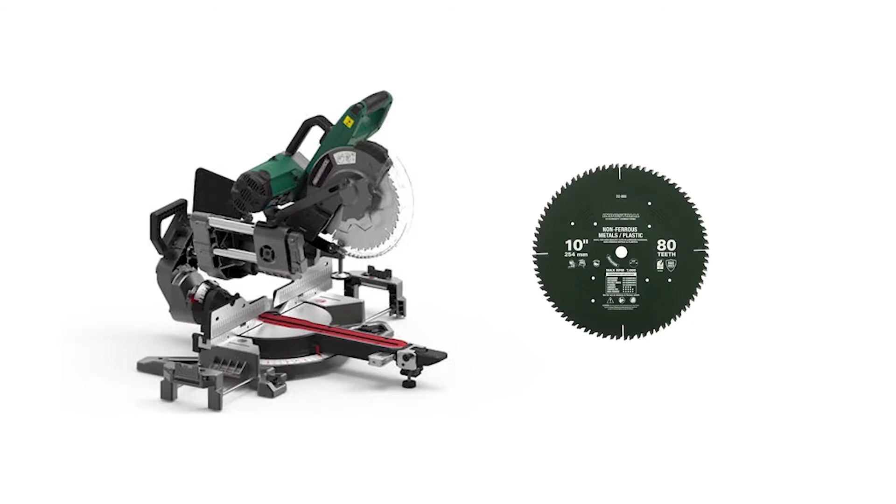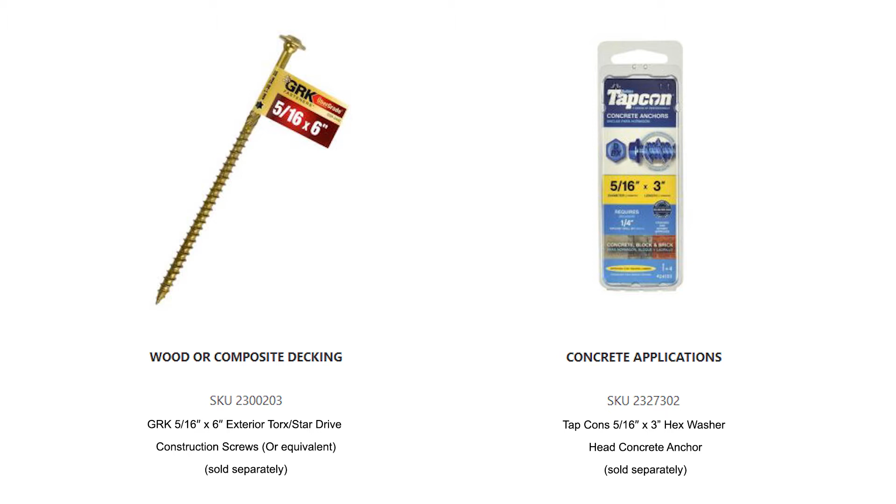We recommend the following tools: safety glasses, tape measure, pencil, level, miter saw with non-ferrous blade, cordless drill, 4 clamps, carpenter square, appropriate fasteners for mounting posts to deck surface, lower rail clip jig, cutoff tool, 6-inch number 2 square

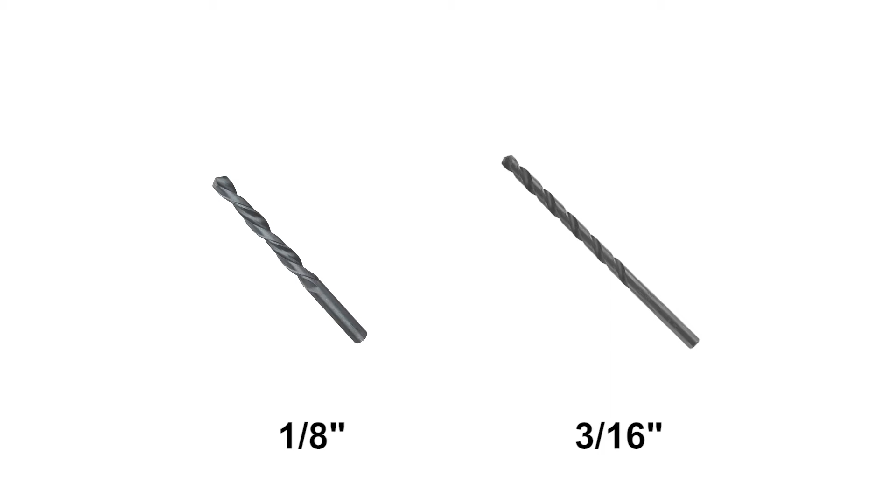drive bit, 1/8" and 3/16" drill bits, 3/16" hex wrench included with cable kits, cable gripping tool (optional), cable cutting tool (optional), cable release tool (optional), threading tool (optional), 90-degree threading tool (optional). Kits and parts for assembly:

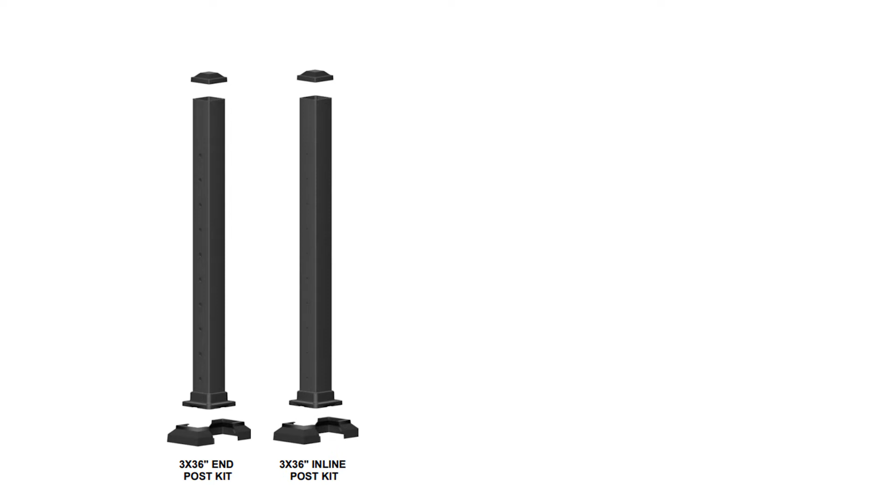3x36" end post, 3x36" inline post, 3x36" corner post, 3x42" inline stair post, 3x42" end stair post. Each post kit includes an aluminum post tube with attached base plate, post cap, 2-piece base plate cover and an install guide.

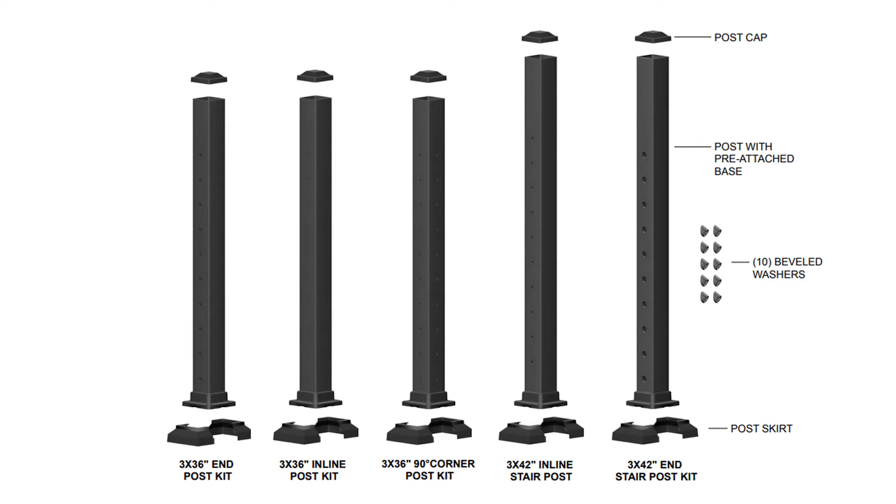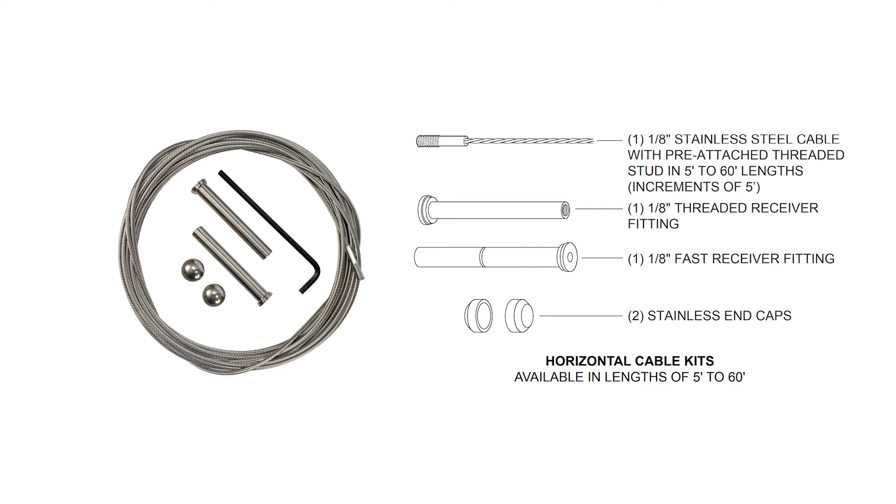3x42" end stair post kit includes 10 beveled washers. Post to deck mount screws and anchors are sold separately. Horizontal cable kits are available in lengths of 5 feet to 60 feet. 1 1/8" stainless steel cable with pre-attached threaded stud in 5 feet to 60 feet lengths, increments of 5 feet.

1 1/8" threaded receiver fitting. 1 1/8" fast receiver fitting. 2 stainless end caps. Horizontal cable deck stair full frame kit: 1 top rail snap, 1 top U-channel, 2 straight plastic plugs, 2 angled plastic plugs.

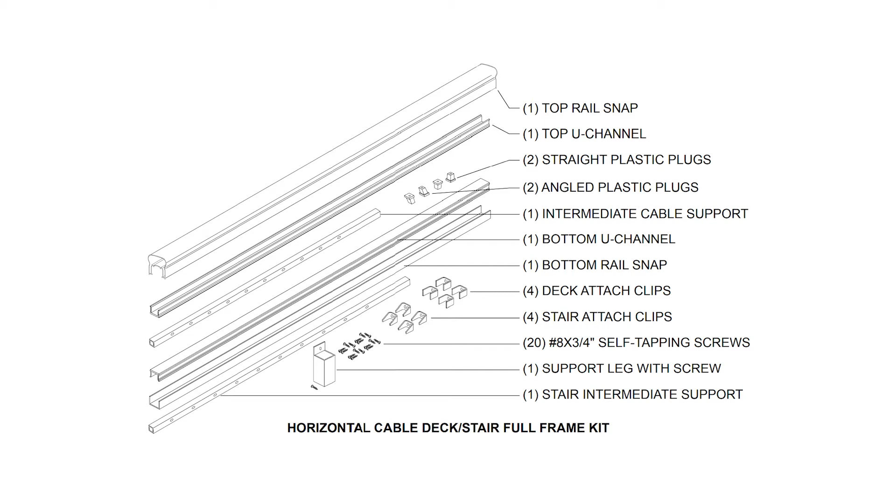1 intermediate cable support, 1 bottom U-channel, 1 bottom rail snap, 4 deck attach clips, 4 stair attach clips, 20 number 8x3/4" self-tapping screws, 1 support leg with screw, 1 stair intermediate support. Important notes: do not install base plate covers until railing assembly is completed.

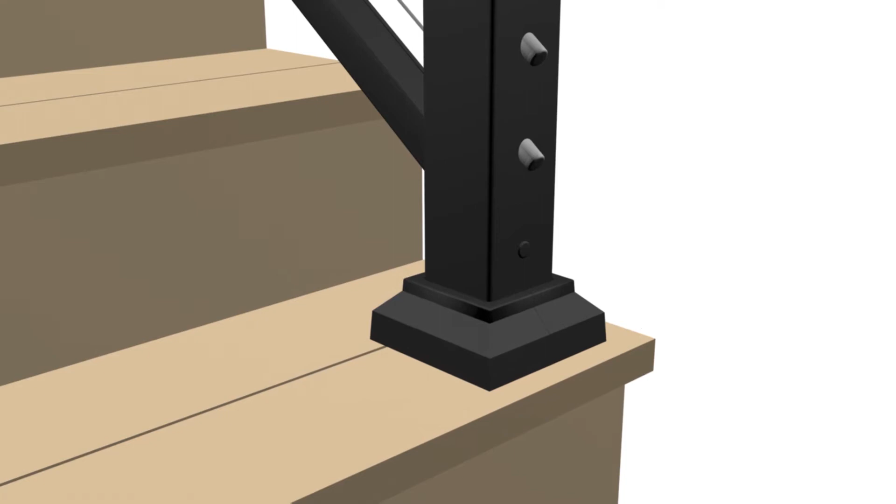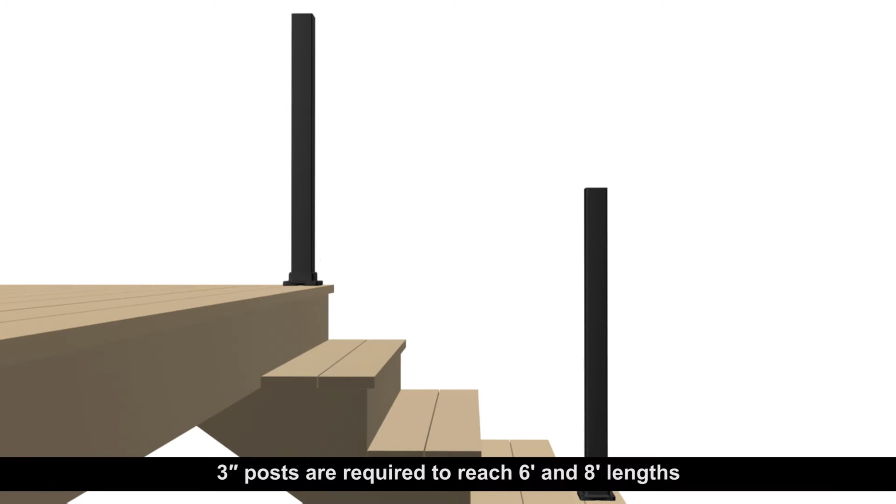Actual cable panel lengths are 69.43 inches and 91.31 inches. 3-inch posts are required to reach 6-foot and 8-foot lengths. Caution: if installing lighting, wiring must be installed prior to securing posts to deck surface and installing top rail snaps. Note: for structural integrity and proper installation, it is critical to use the correct railing posts in all locations.

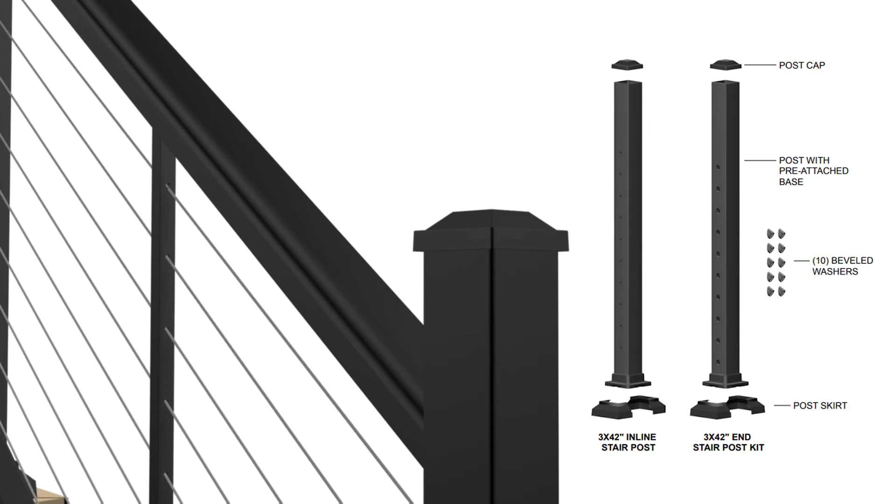Corner posts are required for all 90-degree corners, and inline posts are required for all 45-degree corners. 42-inch stair posts are required for stair applications. Plan ahead for cables up to 60 feet in length and install end posts at the appropriate locations.

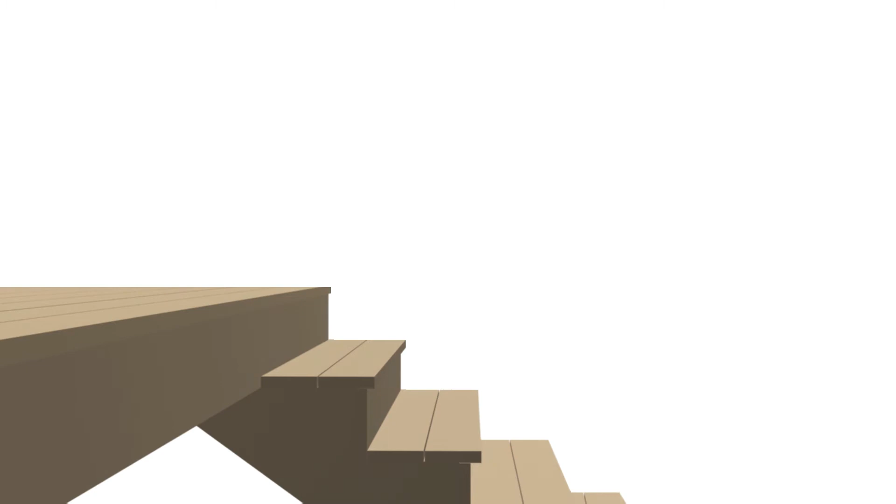Important: for 90-degree corner post applications, prior to installing rail attachment clips, ensure plastic plugs are installed in 2 pre-drilled hole locations. Leave plastic plugs in place until threading cable through corner posts. Determine necessary stair posts required. Install proper post blocking. Use proper attachment screws or anchors as directed. Deck screws at each post location are not included with post kits.

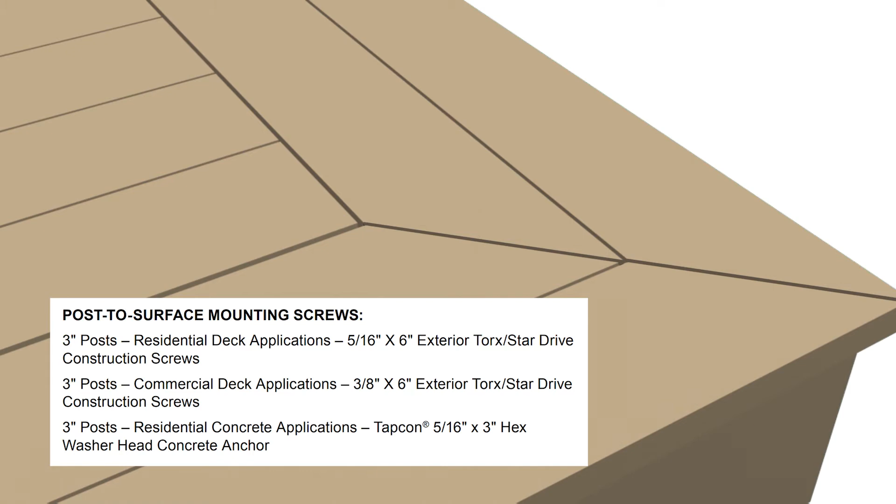With 3/16" drill bit, pre-drill through deck boards and into blocking. Drill a 5/8" hole in center of 4 deck screw holes for lighting wires, optional. Level and plumb post using shims. Secure posts to deck with suggested screws.

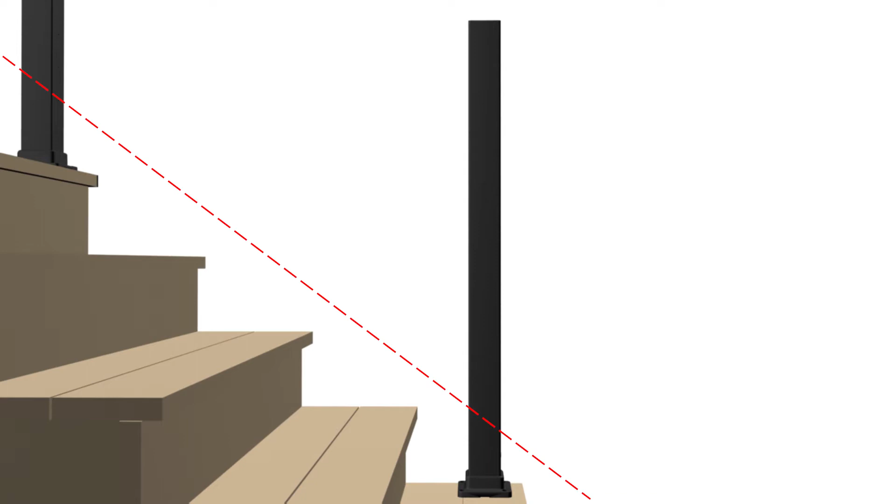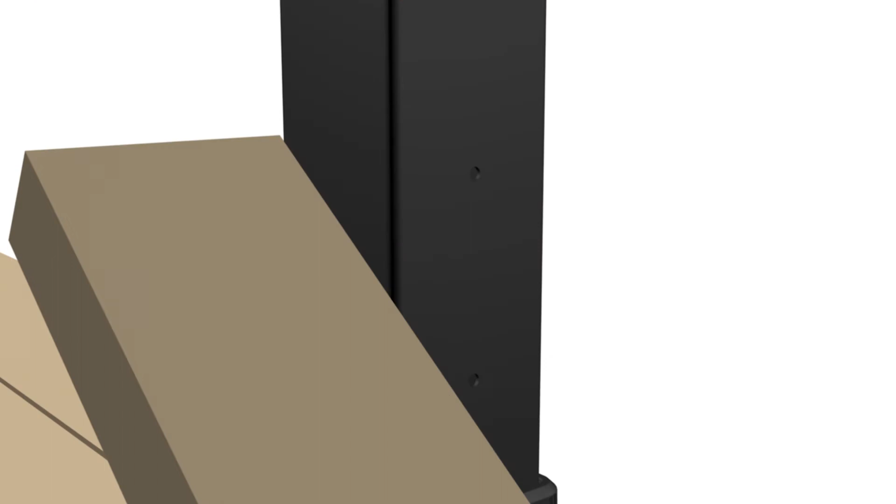Important: front edge of base plate should be equal distance from nose of stairs, however no further than 1 1/2" setback. Note: ensure cable holes align with up-down direction of stairs. At each stair opening, position one U-channel 1 1/2 inch above stair nosing. Tip: place a 2x4 board flat on nose of stair treads and lay U-channel on top of 2x4 board.

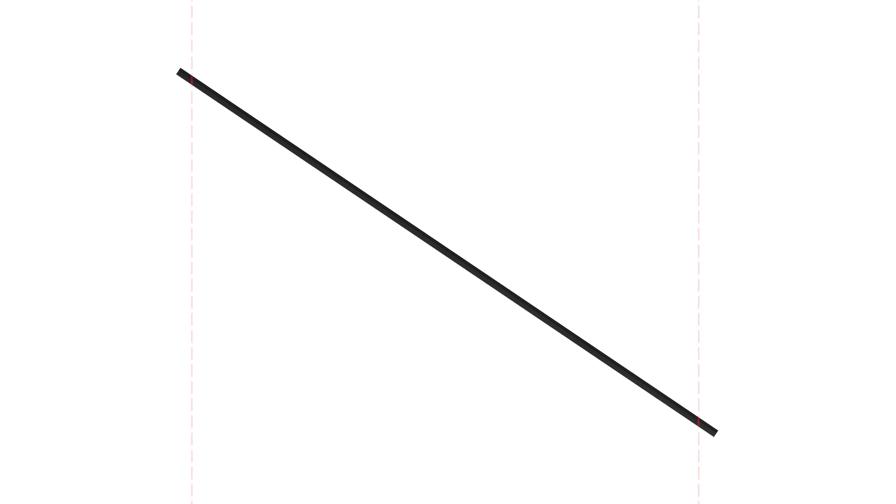Clamp U-channel against 3-inch stair posts. Using a sharp number 2 pencil, mark the U-channel. Remove clamps and cut U-channel with miter saw and a non-ferrous saw blade. Clean cut areas and apply touch-up paint on exposed ends. Measure and mark the center of each U-channel. Drill 1/8 inch hole in the center of each U-channel.

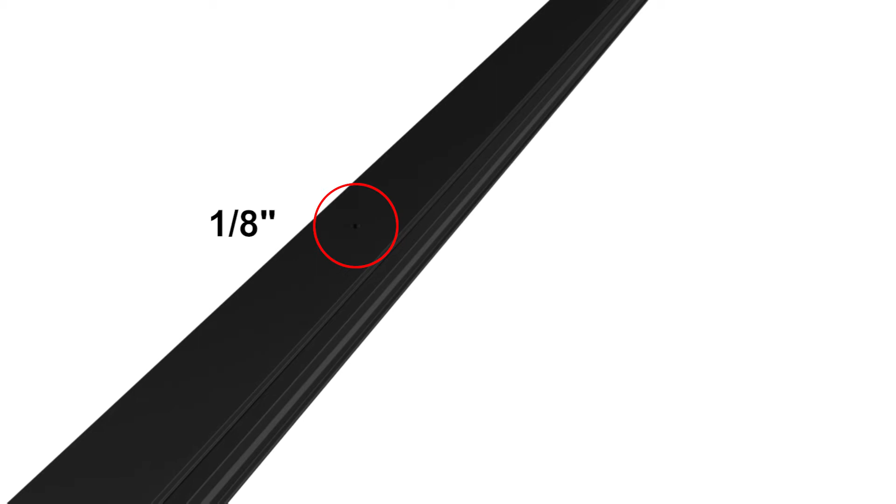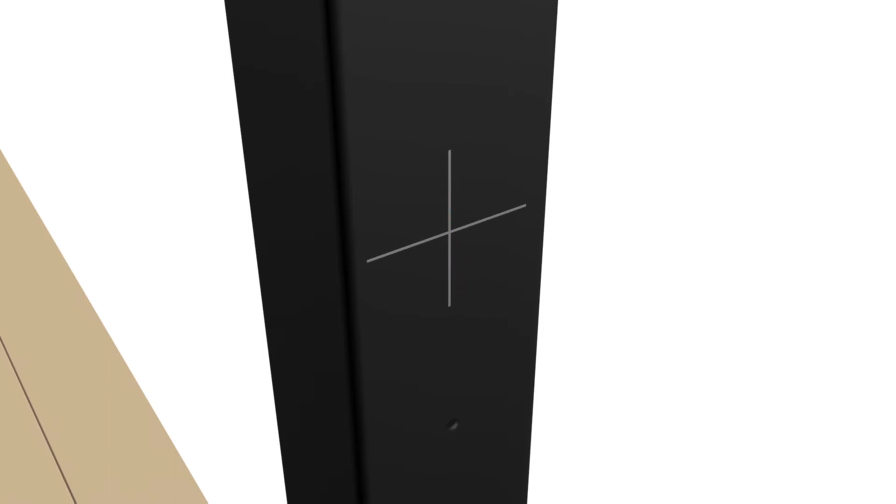For 36-inch stair railings, measure down from the top edge of top post and place a horizontal pencil mark at 3 5/8 inches. Next, measure the center of the 3-inch posts and place a vertical mark at center of post. Place a 2x4 board on nose of stairs between posts. Place a pre-cut U-channel on top of 2x4 and scribe a pencil line on 3-inch post at upper and lower post locations where U-channel meets post.

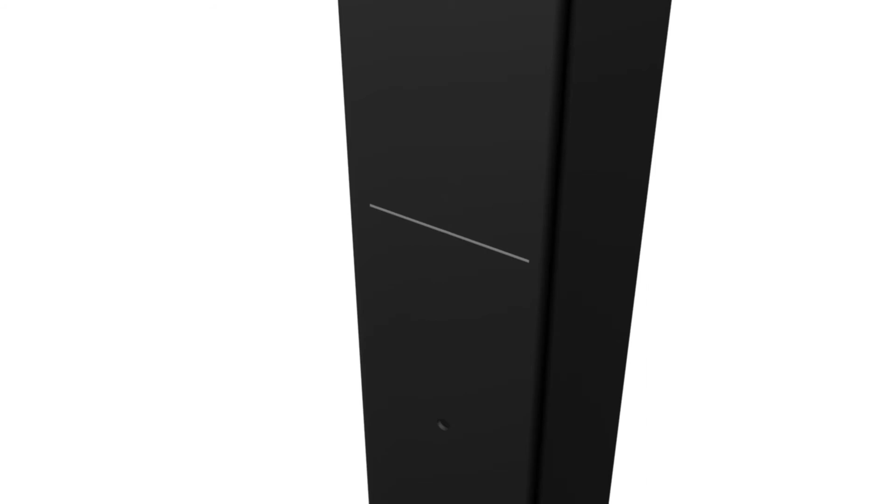Center and align top edge of lower stair rail clips with pencil marks. Attach using two number 8 by 3/4 inch self-tapping screws. At top post location, measure distance between top edge of lower clip to upper line. Note measurement. Return to bottom post and measure up from top edge of lower clip and place pencil mark on post at equal distance as noted on top post.

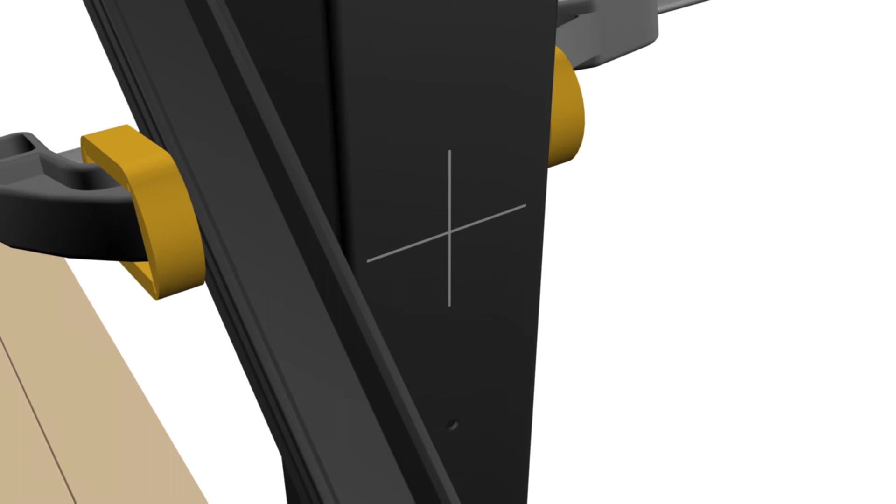Clamp upper U-channel against posts at marked locations. Once channel is clamped to side of post, measure both top and bottom distance between lower U-channel and upper U-channel. Make necessary adjustments to achieve equal opening distance. Using a sharp number 2 pencil, scribe the side of U-channel cut lines.

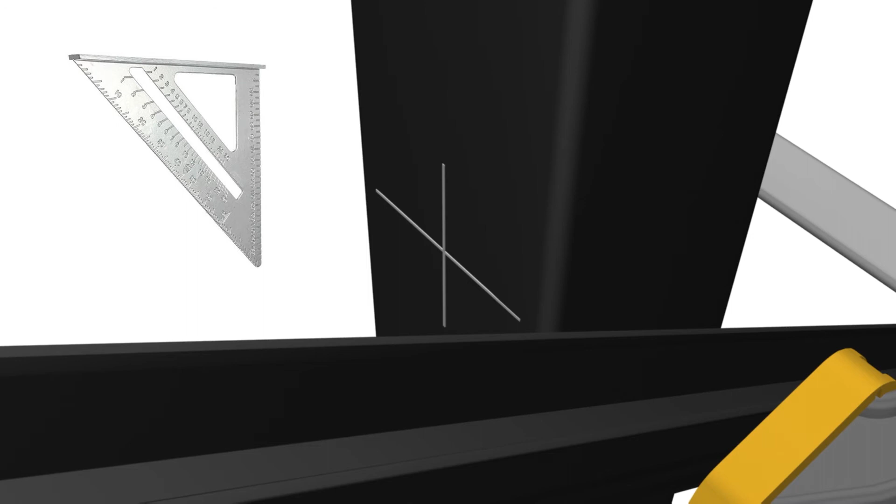Important! Before removing clamps, if adjustments were made from original marked line, a new line will need to be drawn. Use a carpenter square to properly mark new attachment clip position. Install upper clips, both upper and lower posts, with top edge of clip on marked line.

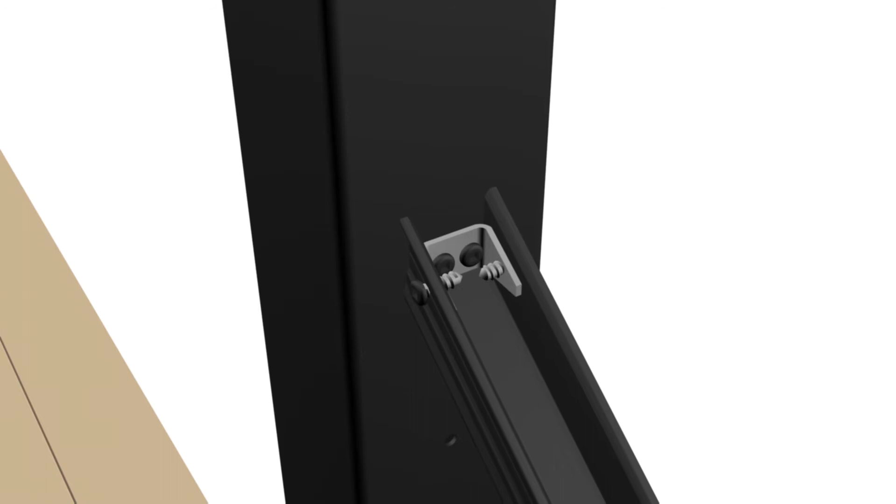Attach one plastic 3/4 inch by 3/4 inch angled plug to lower U-channel with one number 8 by 3/4 inch self-tapping screw. Secure upper and lower U-channels to attach clips with number 8 by 3/4 inch self-tapping screws.

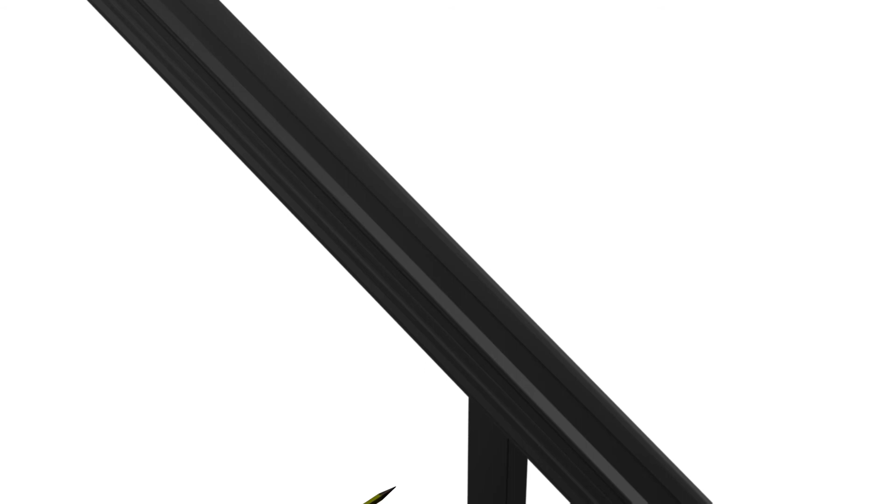Clamp intermediate cable support vertically to the center of upper and lower U-channel. Ensure cable holes align with upper and lower post hole locations. Using a sharp number 2 pencil, scribe cut lines on intermediate cable support and cut intermediate cable support at scribed pencil lines, taking care to cut at appropriate angle. Important! Cut 1/8 inch less saw blade thickness than scribed line to allow for fitment of plastic plugs. Clean cut areas and apply touch-up paint on exposed ends.

Insert plastic plug into upper hole of 3/4 inch by 3/4 inch intermediate cable support. Position 3/4 inch by 3/4 inch intermediate cable support onto lower U-channel plastic plug. Then, attach upper intermediate cable support to upper U-channel with one number 8 by 3/4 inch self-tapping screw.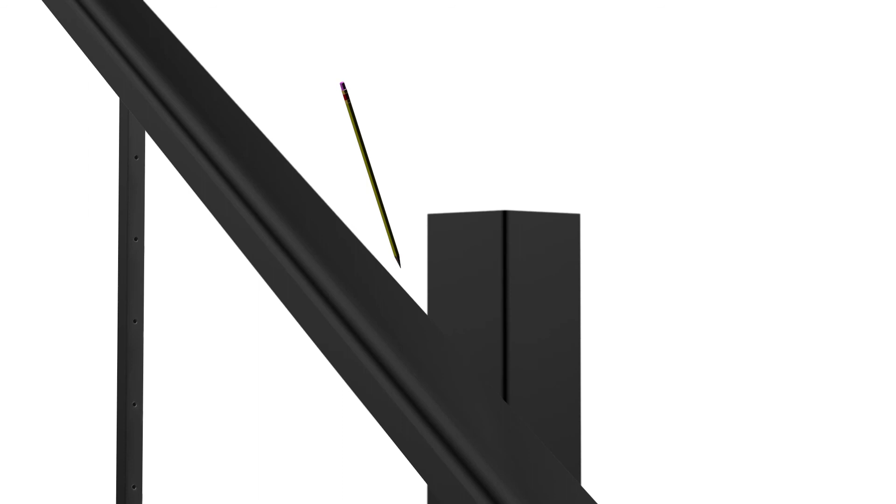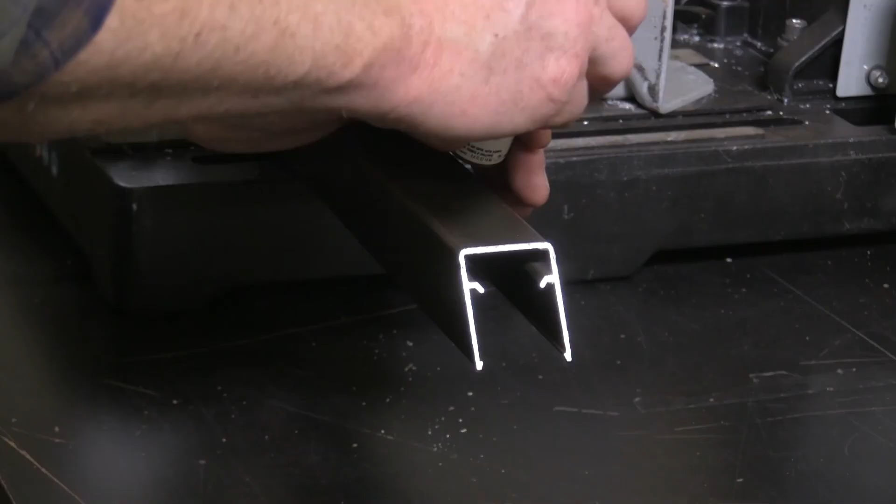Following the same angle as the secured U-channels, clamp or hold top-bottom rail snaps against posts. Using a sharp number 2 pencil, mark the top-bottom rail snaps. Remove clamps and cut top-bottom rail snaps, taking care to cut snaps at appropriate stair angle. Cut 1/16 inch less than opening size. Clean cut areas and apply touch-up paint on exposed ends.

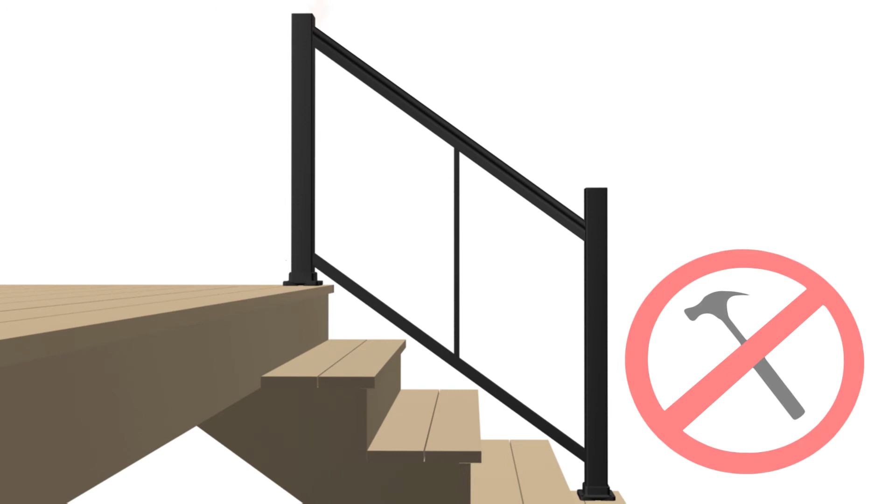Install bottom rail snap first by pressing over lower U-channel until properly seated. Install top rail snap by pushing down on snap until fully seated on the upper U-channel. Helpful hint: apply downward pressure on top rail starting at one post and working towards the other post. Do not use a hammer to secure top rail. Install plastic plugs only in bottom cable holes of end posts which are not used with a bottom rail application.

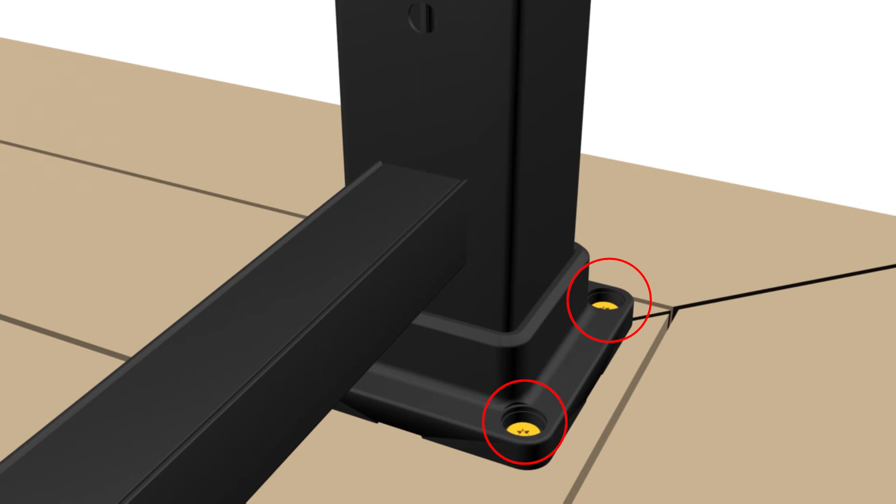Next, we'll install the horizontal stainless steel cables. Insert the threaded receiver fittings into the post. Note, if end post was installed too close to a house wall, it may be necessary to loosen post anchor bolts. Note, plan so that the threaded receiver fittings are at the starting point and the fast receiver fittings are at the bottom of stair run. Cable runs cannot be longer than 60 feet. If railing is longer than 60 feet, an end post will need to be used to finish and start a new cable run.

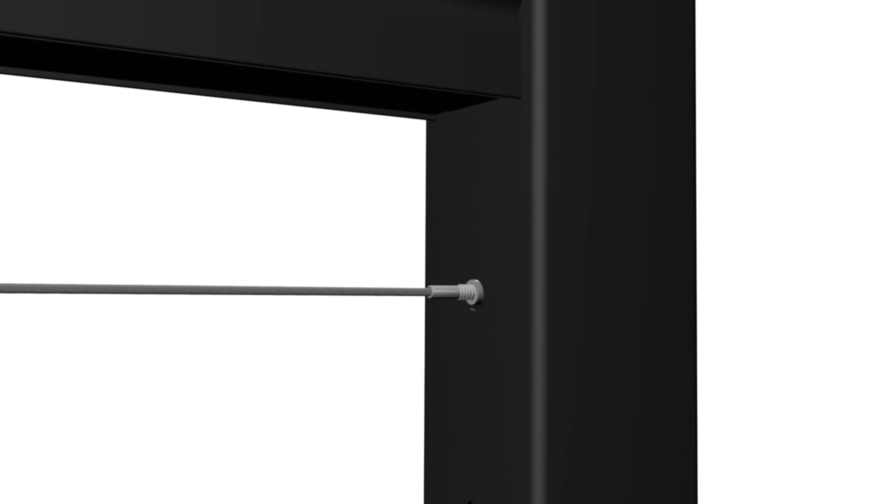Thread the male swaged cable stud, attached to the cable, into the threaded receiver fitting, and turn 3 to 4 complete turns. Thread about 1/2 of the stud into the threaded receiver fitting. Feed the bare end of the cable through all your intermediate cable supports and through the end post where you will be installing the fast receiver fitting.

Corner post inserts allow for easy feeding of cable through 90-degree posts. Cable threading tools, straight and corner versions, are recommended for easy feeding of cables. When using the threading tools, push the cable through posts rather than pulling them. This prevents separation of the cable and tool. Note, alignment plugs are installed in 90-degree posts to keep insert holes aligned. Do not remove plugs until cables are installed into empty holes.

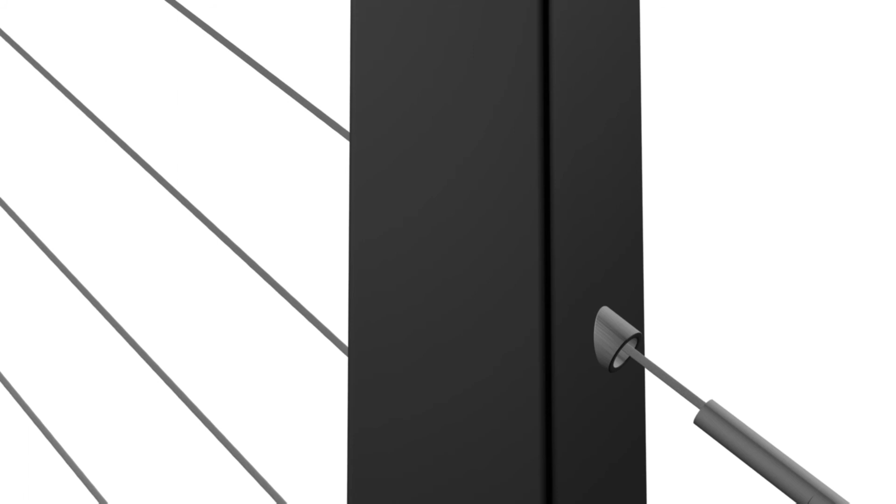Rotate the fast receiver fitting clockwise as you push it onto the cable. If the cable begins to unravel, you are rotating the fitting in the wrong direction. Important: for bottom of stair runs, beveled washers must be installed to align fast receiver fittings with pre-drilled holes in post. Note, it is normal to have trouble inserting the cable into some fittings. This occurs if the locking mechanism is already locked. To free it up, insert a cable release tool or other tool with 1/8 inch or smaller diameter. Larger tools may get locked in the fitting and become very difficult to remove.

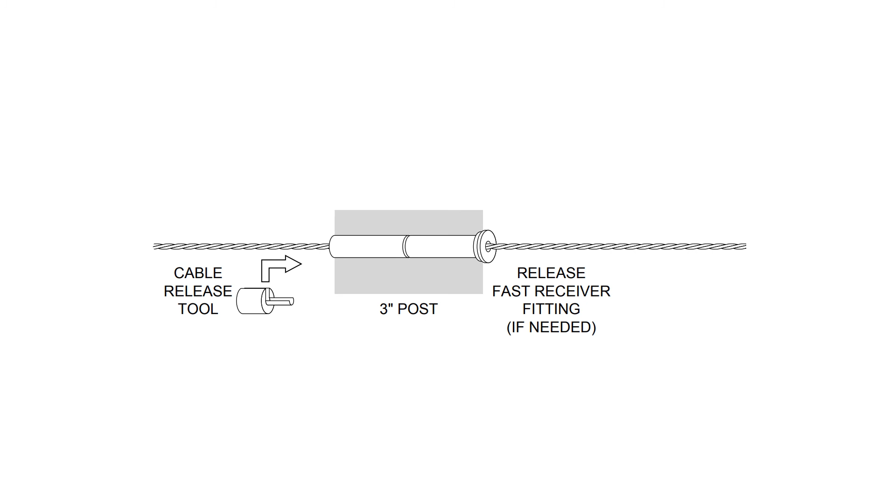Push the fast receiver fitting along the cable and firmly into the hole in your post. While holding the receiver against the end post, pull the bare end of the cable to remove as much slack in the cable as possible. Important: inspect to ensure there is no slack against the whole length of the wire, especially around corners. If you need to remove a cable from the fast receiver fitting, slide a cable release tool onto the cable, then push firmly into the fitting. This will release the mechanism to pull the cable back out. Cut the cable flush with the hole in the back of the fast receiver fitting using a cutoff wheel.

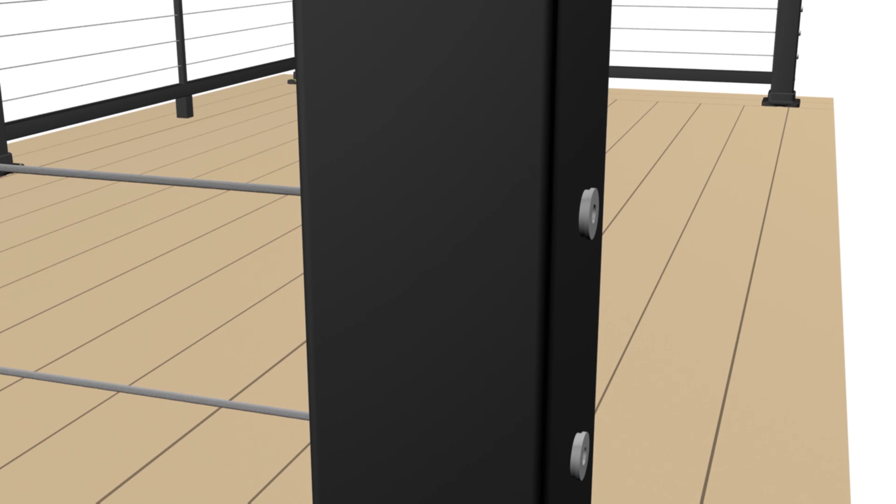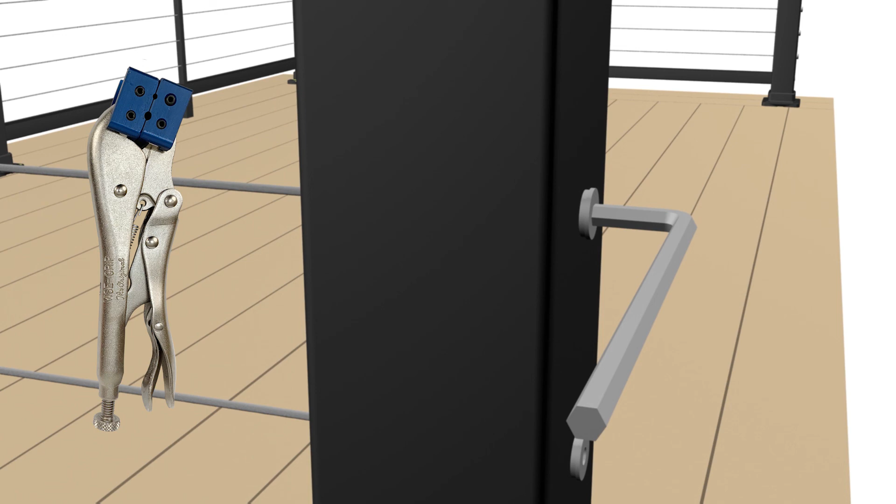Go to the other end and tension the cable by holding the cable securely to prevent it from turning while you turn the threaded receiver fitting with a hex wrench. A cable gripping tool is recommended. Be careful to protect the cable from damage while tensioning. The male swaged cable stud will be pulled into the threaded receiver fitting by rotating the threaded receiver fitting clockwise.

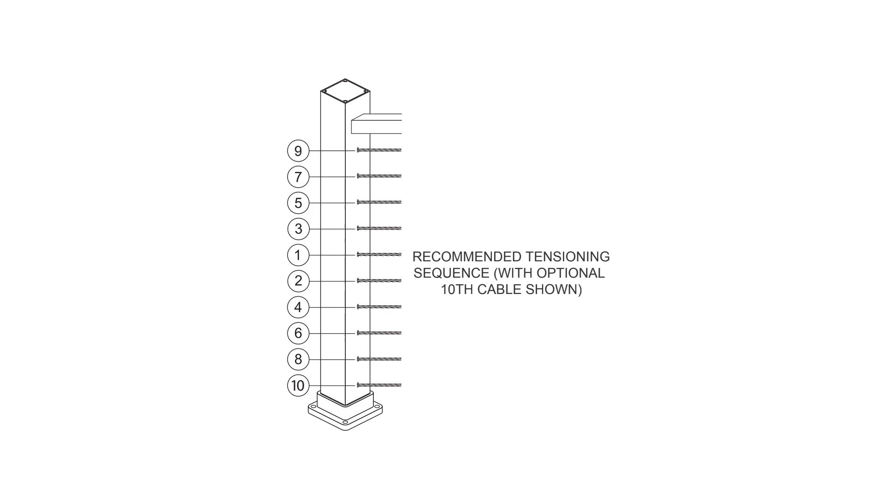Tension all cables in sequence, beginning with the center cables, moving up and down toward the top and bottom. As you tension each cable, give it a sharp pull downward mid-span to help set the wedges, gripping mechanisms in fast receiver fittings. Then retension as necessary in the same sequence. Be aware that the cable may move as much as 3/16 inch toward the tensioning terminal as the wedges seat.

Press stainless steel caps onto all fast receiver fittings and threaded receiver fittings. Helpful hint: spray window cleaner onto stainless steel caps to ease installation. Install post caps and post base plate vinyl covers after railing assembly is completed.